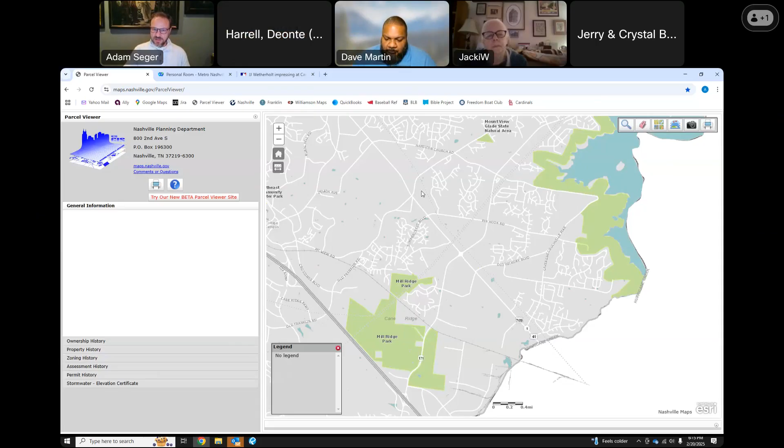Okay, so for those on the call, this first screen is just a parcel viewer, and I'll zoom into the property. You can see out here on Murfreesboro Pike, we're south of Old Hickory Boulevard and to the left of Couchville Pike. What you're going to notice as I zoom in is this red candy stripe kind of hatching.

That's because we're in the Murfreesboro Pike UDO that was implemented, I don't know, 10, 15 years ago. That's really more of what we call an aesthetic UDO. It has requirements for signs, sidewalks, frontages, landscaping, and so we would have to abide by that like any of the other properties.

And so the 2 properties are these right here. I'm going to switch over to this screen right here that I prepared. So that white is where our site is. It's about 10 acres, a shade more.

And what you're seeing here is a zoning map where I went ahead and identified a lot of the zonings up and down Murfreesboro Pike in the area. And so anytime we look at a zoning...

Let me introduce myself too, since I wasn't on the previous meetings. Just a quick aside, my name's Adam Seeger. I work with Dale & Associates. I'm a civil engineer, and Dave has engaged us to help through the zoning process, the design.

We are kind of in the middle of a lot of these projects in Nashville because we work with the Planning Commission, Council, Stormwater, Water Services, Planning, NDOT, TDOT. We work with all of these various departments. So if y'all have any questions, please feel free to ask. I'm happy to answer them if I can. But that's just a quick aside on who's talking to you right now.

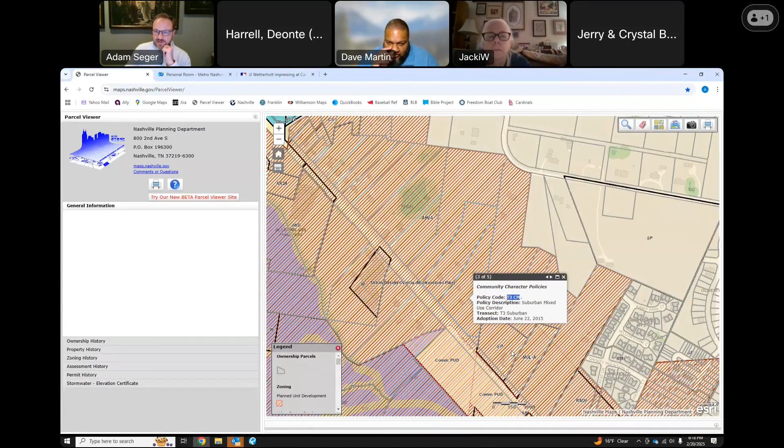That's a tool that Nashville Planning uses to direct what they think this property should be. So when you click on it, you're going to see what's called T3CM policy, which is a suburban mixed use corridor.

What that means is when the planning department receives this project and wonders what to zone it, they're going to see this and say it needs to be zoned something that fits within a suburban mixed use corridor, which has a very wide array of uses.

I don't think anybody's unfamiliar with Murfreesboro Pike. You're going to have a lot of commercial, a lot of multifamily, and actually a lot of industrial across the street. As these properties develop, they get rezoned, and I showed examples on screen of what properties are being rezoned to in the area.

You have RM20, which is multifamily residential. You have MUL and MUL-ANS, where MU stands for mixed use, allowing commercial, office, and residential—just about anything. CS is commercial zoning; anything with a C in front is commercial. And SP is a specific plan zoning, which some of you may have heard of.

What we're proposing here is an RM15, a residential multifamily zoning. We're doing that specifically because Dave came to us and said he'd really like to do a nice townhome product out here, and RM15 would fit nicely with that.

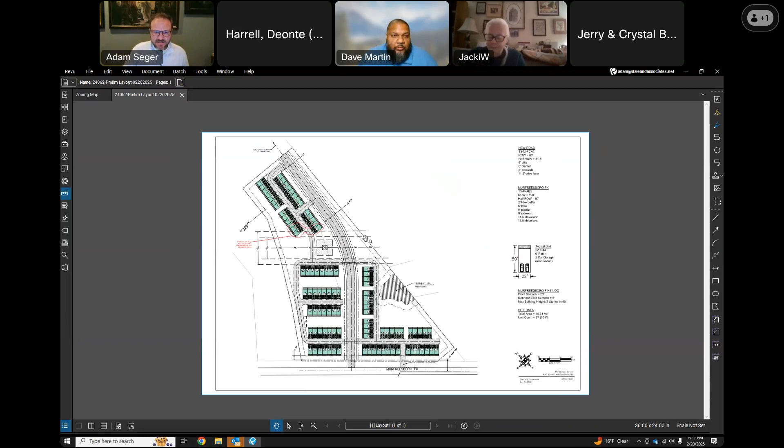That road would connect through, and Dave's team would be responsible for building that public road for the community. We do have an alternate emergency access. We want good access to Murfreesboro Pike, but we also don't want too many access points because TDOT wouldn't allow it.

Dave, you want to add anything to what I just said? Couple small things. I appreciate it, Adam.

So a couple things. One is that road coming through, which is dictated by the city of Nashville, does not connect through to Maxwell Road. On the north side, Maxwell comes through, and if there's additional property behind it, that would have to be potentially developed for that connection. So this property does not connect directly to Maxwell, but that connector road we'd have to put in this community would essentially be the lead-in from Murfreesboro Pike to Maxwell if it ever did connect, becoming a three-way stop there instead of the current curve that's back there for Maxwell Road.

But otherwise, like I said, this is consistent with what we talked about before—doing a residential community here, potentially doing the townhomes and making it a very nice townhome community for our home buyers.

Hey Dave, you guys have any questions or additional comments, Councilmember Harrell?

I do have a question regarding the 4 units that are highlighted with the red outline. So, do you want to talk to it, or Adam?

At this stage, anytime we're in the zoning phase of a project, everything is still preliminary and conceptual. What we do for our clients, what we do for Dave, is highlight areas as a heads up, like 'you may have something here.' Don't count on this being super exact, because a survey will have to be performed to develop this property.

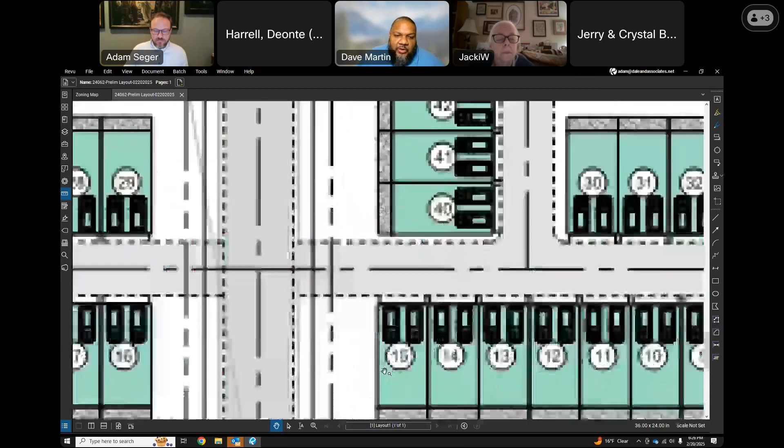Sure. So for parking, every unit would have a 2-car garage with rear entry. Each individual unit has its own dedicated 2-car garage parking. We'd also look at potentially using part of that TVA easement for guest parking—we can't build any structures there, but we could use it for additional guest parking outside some of our other areas. This layout is just conceptual, but there are a lot of nooks and crannies to put guest parking.

It's not shown on this drawing because the purpose is a lot study, not final construction drawings or parking plans, but there are ample areas to put parking on the TVA easement in between these units, where I just drew that in red. Okay, I appreciate that—just confirming, each unit will have its own two-car garage.

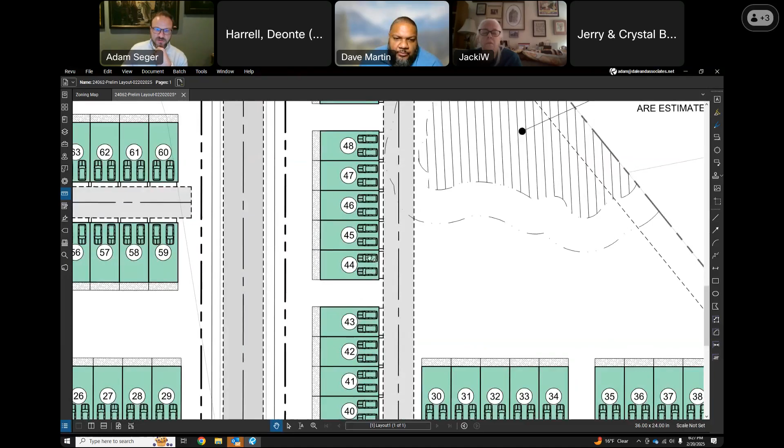There was a question in the chat: will these units have driveways? Yeah, these are drawn to be rear loaded, with two garages. The garage door will probably be 4 or 5 feet off the rear drive access, so these are all rear loaded—your front door faces the street. That's pretty common in a rear loaded concept. In a front loaded situation, we'd normally have bigger driveways where people queue up.

In this concept, there's going to be a lot of guest parking. Let me draw it again and keep it there—excuse my mouse drawing—but there will be opportunities here, and throughout, for additional guest parking.

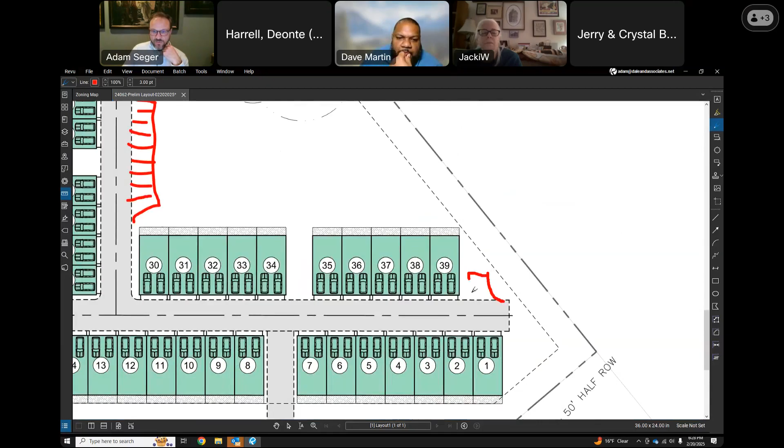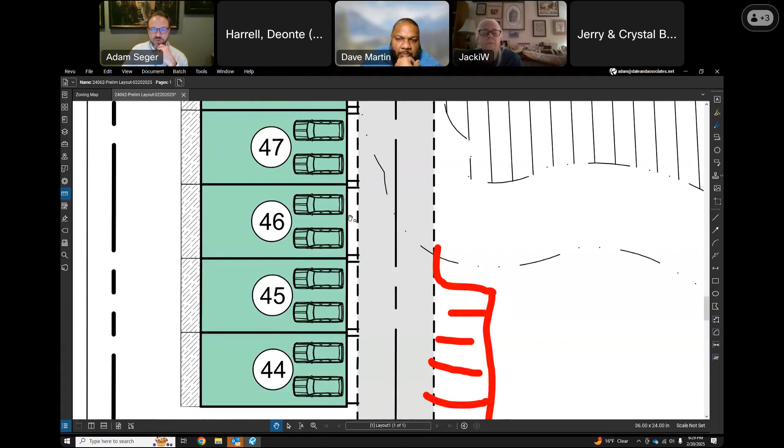This whole area up in the TVA could have guest parking, however all that stuff shakes out. But to answer that question about a driveway, no, these won't have a driveway here. Typically you're going to want these not have driveways - it keeps them tidier so people aren't driving in and sticking out into the drive aisle. Sometimes if you had 12, 14 feet, people just pull in and the back end of the car sticks out. But when we keep them shorter like this, nobody's tempted to have cars sitting in the aisleway, so it keeps these aisleways open. You're either in your garage or you're not, and that's what we'll typically see on developments like this.

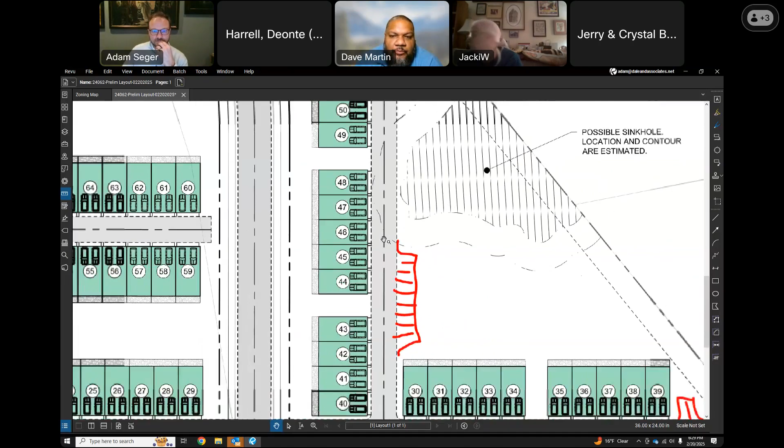And we will have connectivity to Murfreesboro Pike regarding sidewalks, correct? That is correct.

Okay, what is the anticipated starting point regarding price? It's a good question, Councilor Harrell. So anticipated starting point is probably going to be right around the 300s or so. And we're working every option to try to get those down as low as possible to encourage home ownership.

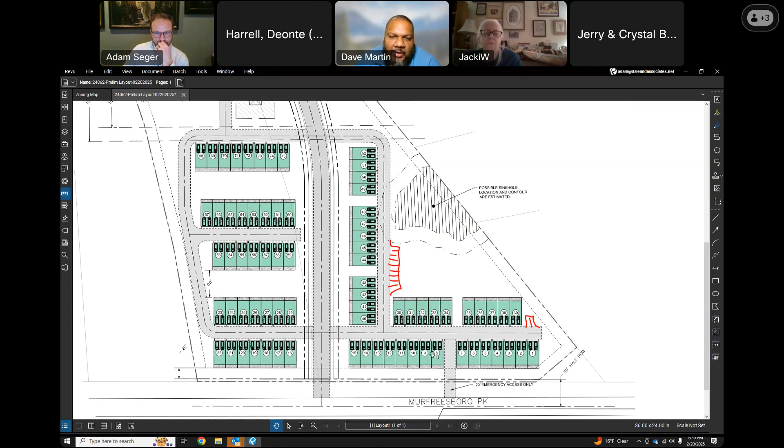While Dave is pulling that up, does anyone have any questions?

Do you have pictures of the homes that we can see? I do. So Councilman Harrell, if you don't mind allowing me to share, I'll share some of these. The ones I'm going to show you are actually the exact same type of community I did in Madison, Tennessee, and it really came out to be a really nice one. So I'll show you some pictures of those, as well as some renderings and a sample of the floor plans we did out there. Good, perfect, thank you.

And I'm pulling this up too. I've got a couple different things I can show you. All right, let me attempt to share here. Okay, here we go. It's going to be a little clunky because I'm getting used to the WebEx side.

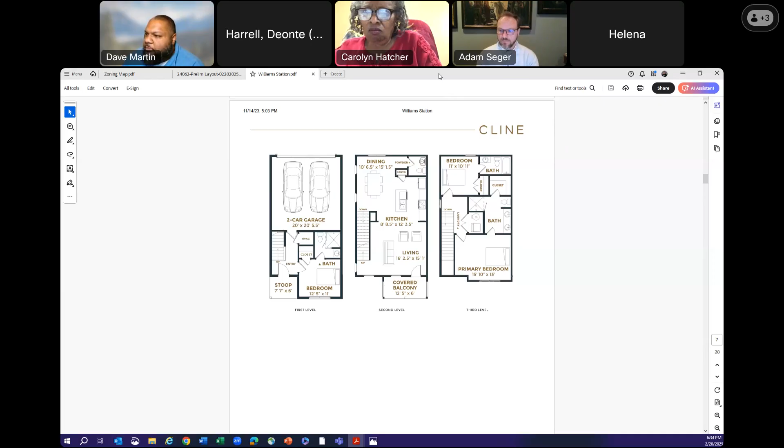Okay, well Dave, I like this. This looks good, man. We had some conversations previously, and everything that we discussed, you have been very detailed in including that, so I appreciate that. Moving forward, what do you need from me? Are you ready to go to planning?

Yes, I appreciate it. We're ready to go to planning, and just for the context of the group here, the planning step is not the final step. Once we go to planning for the rezoning, I would still like to continue to work with this community and put together a group here as we get forward into actual unit design, layouts, floor plans, and things like that. We'd like to continually work with the group here as we get more of a finalized site plan and layouts.

I would appreciate that, because I know once it is submitted to planning, there may be some changes requested or some accommodations that they may request. So I appreciate you being willing to bring that back to the community once we have that information. Is there any other questions or concerns in the community?

Are we liking it? Does it look good? Yay, nay? All right, okay. Jackie, I see you smiling - I'll take that as a yay.

Well, those look nice. Thank you guys for the feedback.